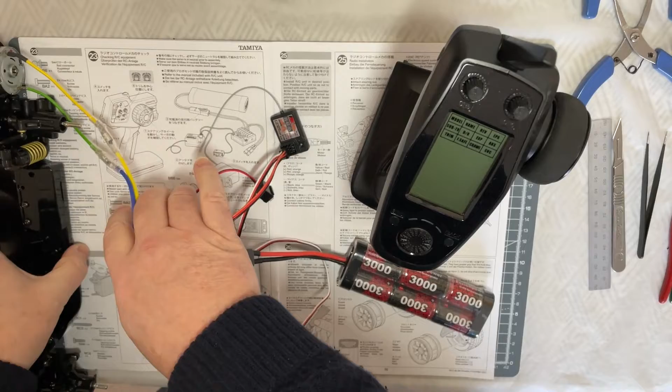Okay, so we are now on step 23, and step 23 is all about your radio gear. With step 23, you connect up your receivers, your servo, and your electronic speed controller.

So as you can see, battery in, motor wires are on, your electronic speed controller on number 2 channel on your receiver, and your servo onto channel 1 onto your receiver.

And here we have my FlySky system. I've selected a spare port on my model port on my actual transmitter, and I've actually already bound my FlySky receiver. So it's a matter of testing and centralizing the servo.

So let's turn her on. There we go, there's that little beep. So servo, as you can hear, as you can see the torque of the servo, nice servo, and we've got forward, brake, and reverse.

Happy with that, they're all working, everything's in place. Servo is now neutralized because I've used that to neutralize it. There we are, we can turn off our systems and start doing the servo.

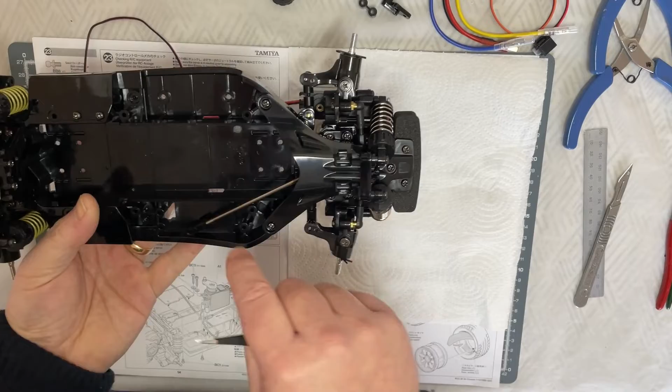Almost like it's slightly off the center. So although you centered your servo, the servo horn is going to be 15 degrees off the center, and I'm assuming that's to make up for the quirkiness of how they've put the steering linkage system in, because it's at a diagonal. All right, so let's put this bit together.

So that's your P5 part. Now your P4 part, you need to put that on top like that. Then we need to do this A3 part, so we'll put the little ball connector on top of that.

So we'll take our driver, that's a bit better, straighter, there we are. Drive that home. Like that. That will go then like that.

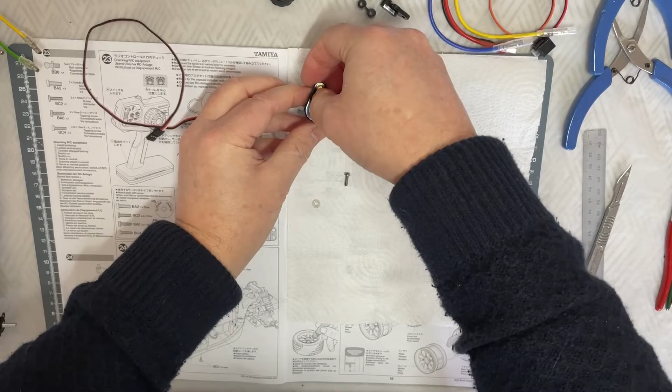So what we need to do is we need to adjust. So this is 15 degrees the other way, like that. Okay, and then pop that on there.

My 3x10. Need to screw that into place onto the servo. There we are. So now we have step 23 completed, and we continue on.

So for step 24, we need some more component parts. So we need the B5, which is this plate. We need the A5, which is this. We also need this part here, which is the A1, which is this guy here.

We need some more parts from C-Bag. So BC1s, we need 2 of those, that's the 3x6mm machine screws. BC3s, 2 of those, which are the self-tapping screws, 3x18mm. BA6s, which are self-tapping screws again, these are the 3x10mm screws, and we need the BC8s, which is the washers. We need 4 of those.

Okay, we need those. We need our servo, which we made up in step 23, and our chassis. We're going to place the servo into the chassis, connect it to the steering linkage system, and put this cover on as well. All right, nice easy step again.

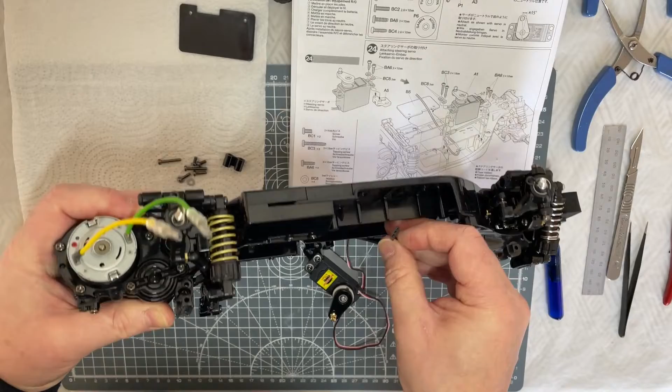Like that. Okay, I anticipate there'll be some form of glass tape or something over here in a moment, later on in the later steps, but we want to make sure this is kind of straight and looks nice. So I'm just going to figure out which way round to put this.

Okay, so I figured out the neatest way I can do this is to little loop here, because there's another little bracket we've got to fit in, which is this A1 part, and then it goes sort of down into the bottom of the chassis and across like that. So there we are, that's kind of where we need to be. So this little part here is going to go in here underneath the servo and connect the servo and the chassis together, and that will keep the cable where I want it to be.

So we're going to do that next. Just line that up, and then take the longer of the self-tapping screws and the washers. So we're going to be using the BC3s and the washers. One on that side, on that one, and one on that one. And then screw these through, and that'll screw the servo all the way down onto the chassis.

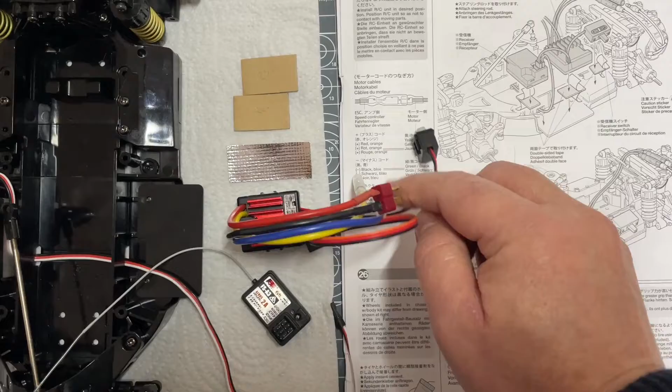Okay, so for step 25, we need to start thinking about putting our receiver and our electronic speed controller, our little switch, and start thinking about putting these into the chassis. So it says to put it here onto this plate here, so you need to pop those there. The switch was going to be double-sided onto there, and the receiver in here as well, whichever way around suits.

So yeah, got some of this glass tape to stick down here so that it just doesn't get rubbed away, and we've got some double-sided tape to stick on the back of your electronic speed controller and your receiver to be able to stick onto this tray.

So I'm just trying to work out where best to put these items, because I know it says put them on this plate, but I'm kind of thinking maybe the receiver can go more inboard, depending on where we want to put the battery, because I've got a bit more flexibility since this is the long chassis, so the battery could go here. I know the manual says put these parts down here so that the battery sits more at this end of the car. So I'm kind of thinking perhaps I don't want the receiver at the front end because it's a bit open.

And don't want it too near here, and I'm wondering if there is a possibility of adjusting this slightly and putting it so that the battery is more forwards, bringing some of the weight to the front of the car, and putting this more at the back here like this, so that stops it from jiggling around, so the battery doesn't jiggle around, and perhaps might even be able to stick this somewhere at the back here instead. So we'll see, won't we?

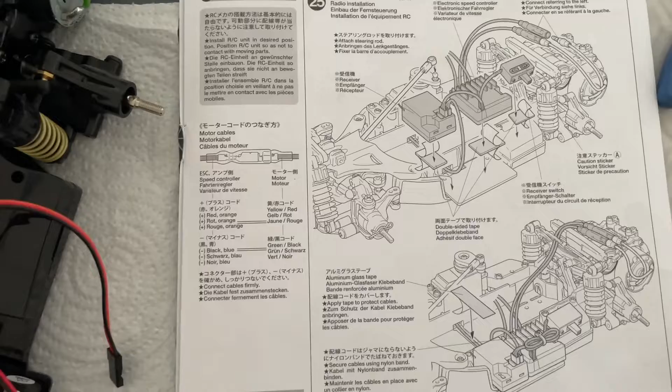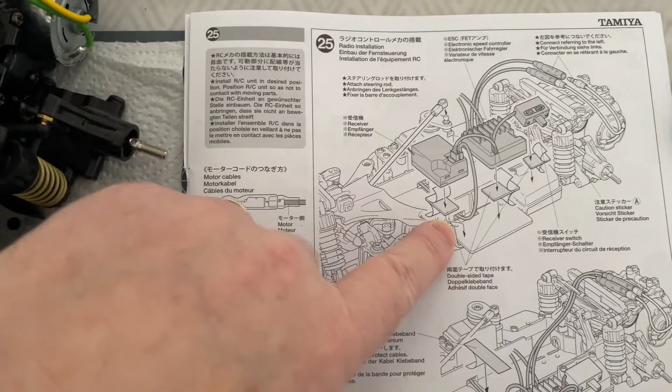See how it goes. We're continuing on with step 25, which is installing the radio gear, ESC, and wiring. I've just got a slightly different route. So on here it says put the receiver and the ESC on the plate.

I've got a bit of wiring to tidy up, but I've decided I'm happy to put the electric speed controller on that plate, no problem, so the switch can stay on the side of the ESC rather than being stuck at a weird angle. They say put the switch on top of this bit here, but no, I've decided to make a little bracket to fit in and put my receiver on there.

The reason being, once you put the battery in, there's a spacer, and I can bring the battery forward. The battery can sit in there, and that little spacer stops it from going in, so that should allow the wiring and such to go into that area. It should be enough room.

So I've got a bit of cable management to sort out now, and then we can get on to step 26, which is the wheels and tires.

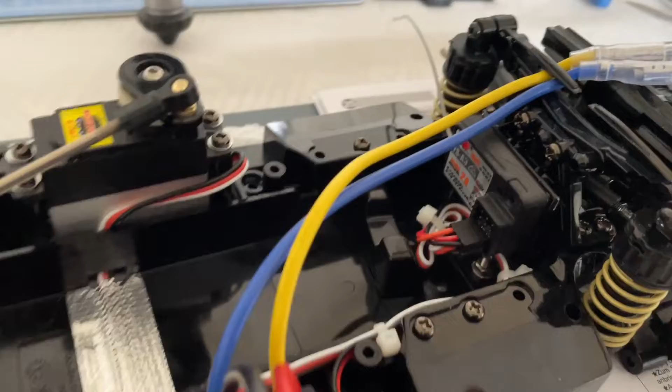Pretty good though, I think that looks a bit better. With a little bit of patience and manipulation, I've kind of got the wiring where I need it to be, underneath the receiver, with the motor wires going out to the back.

Just got to put some more cable ties on to hold it in place, and then we worry about this battery one afterwards. So we can now move on to the wheels and tyres at this stage.

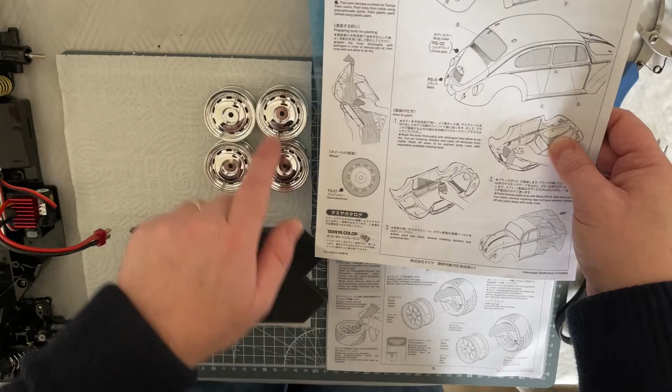Into the next step, we're on step 26, and it's wheels and tyres time. The Tamiya manual, on the bodywork side, talks about spraying the aluminium wheels. They've got this nice chrome finish, and they talk about putting on this gloss aluminium, leaving a chrome finish in the centre.

While that perhaps might look nice and more period, I quite like the wheels as they are. I like this chrome finish, it's nice and bling. So I'm going to leave that, I'm not going to do this colour scheme. Anyway, tyres time.

There's two sets of tyres for this chassis. You've got a front set, which are in this blue bag. Just have a quick sniff... oh yeah. These are the standard road tyres with the grip.

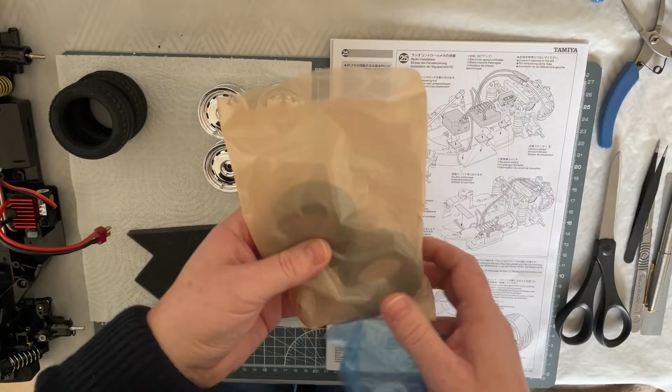Then you've got the rear set of tyres in this orangey sort of bag, and these feel a lot softer than the front ones, so I think these are going to have more grip. Because it's a rear wheel drive chassis, you're going to want a bit more grip on the back. About the same, sorry, have to do the sniff test. Yeah, you can blame Simon Webb for starting that off, pop along and see his channel.

These rear ones have a little '2' symbol on the inner wall here. I don't know if the camera will pick that up, but those are the ones that go on the rear because they're a softer, much softer compound, a bit stickier as well, so I can see why they'll give more grip for the rear. So it's a case of putting the foams inside the tyres and putting the tyres on the wheels, and the wheels we need to super glue just to make sure they don't come off.

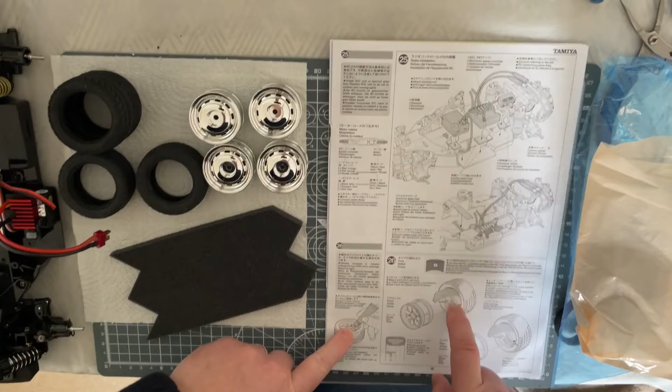That'll be step 26, so I'll get them done and show you the results. For step 26, we're just basically putting the tyres and wheels together, and you'll see the foams go in there.

Look, you can see I've just literally maneuvered that in, you just make it, press it in. There's no real technique to it here. You put it in, you meet up the sponge, and you just push it in. So there we are.

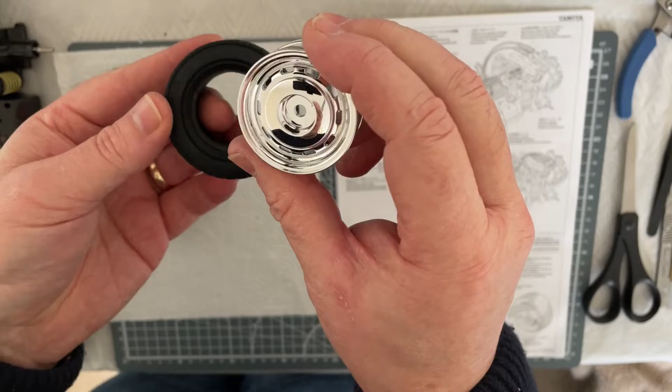So once you've put the sponge inside the tyre, you then take your wheel, and there's no right or wrong way of doing this. You maneuver it, get the thread over it, and stretch it and give it a tug here and there. The idea is you want to make sure you get this fitted correctly.

The drawing says the idea is you need to get the sponge sitting in the middle of the wheel, so that the rim at the edges, the bead, actually sits correctly in the wheel. So you sort of have to manhandle it a bit to get it round, and then push the sponge into the middle so that it seats correctly.

You basically go around feeling for the sponge going into that center rim, and make sure the bead sits nice and straight. If it's sort of sitting up like this, you know it's not sitting correctly, so you've got to manhandle it around a bit and get it to sit right.

That's all we need to do, and once you've got it sitting right, you can start thinking about gluing them. Got to have a little look at how they look on the car first before I glue them. I don't know whether I need to do this extra bit of painting or not, but we'll see. That's kind of how you put that on. Needs a little bit of manipulation.

Let's put that sponge in. Yeah, there we go. So that's the wheel and tyre, and you can see I've done the fronts and the backs.

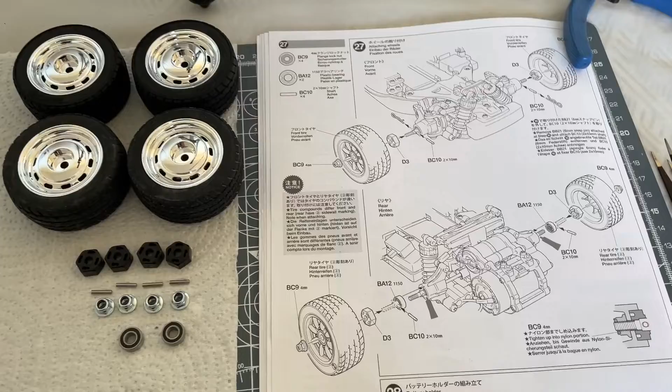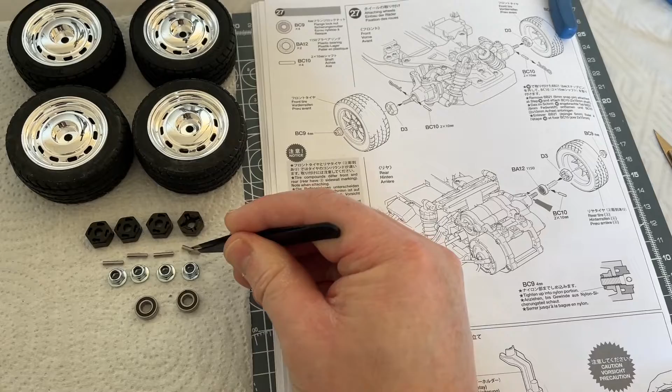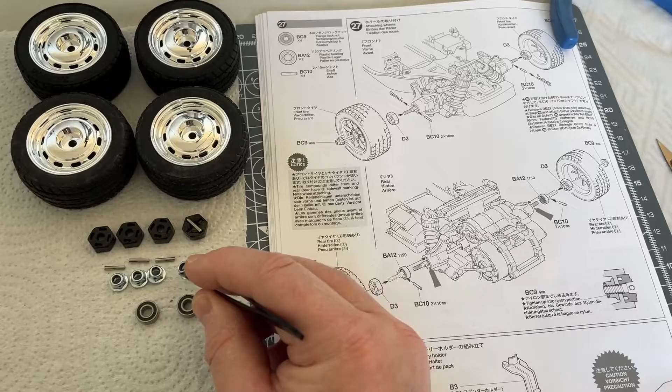Here we are, we're now on step 27, and step 27 needs some more parts: 12mm hexes that go with our wheels, our axles, our little shafts here. These are the little 2x10mm shafts that go across the axles and locate in the hexes. We also need our wheels and tyres, our wheel nuts which are 4mm flanged with a locking nut system, and a couple of our 1150 bearings.

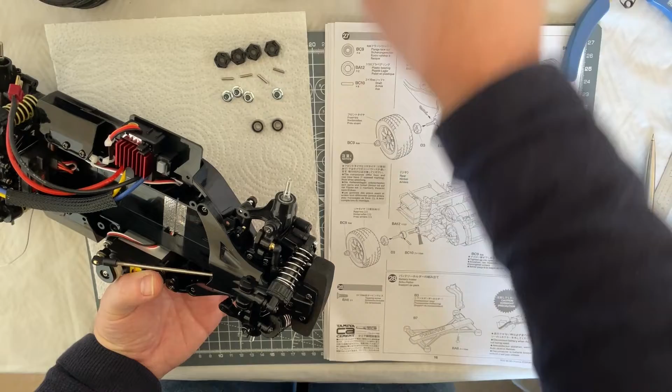Let me show you how to put the front section on. So we're going to move out the pin like that, keep hold of that for another day, and replace that pin with one of our 2x10mm shafts. Pop that through the same hole the pin went through. Take one of your hexes and push that on like that.

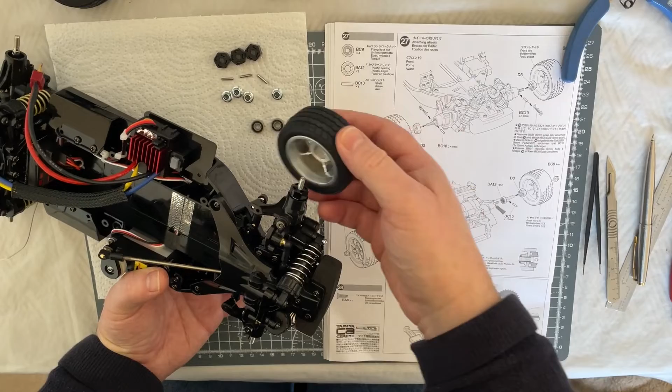Take one of your front wheels, there we are. Then take one of your 4mm flanged locking nuts and tighten that up onto the wheel. It's as easy as that. That's the fronts, so I'll do the other front and show you in a moment.

And there we go, that's your front wheels on with the bearings. Right, now we're going to do the rear of the car. Very similar to the front, except we've got to get one of our 1150 bearings on. So take your bearing, pop that over the axle, and make sure that goes in all the way home. There we are.

Then we need to make sure the 2x10mm shaft goes in, like that, there we are. Our hex goes again over the shaft, and then we take one of our rear wheels. Remember, our rear wheels were the ones with a little 2 on them. Take that on.

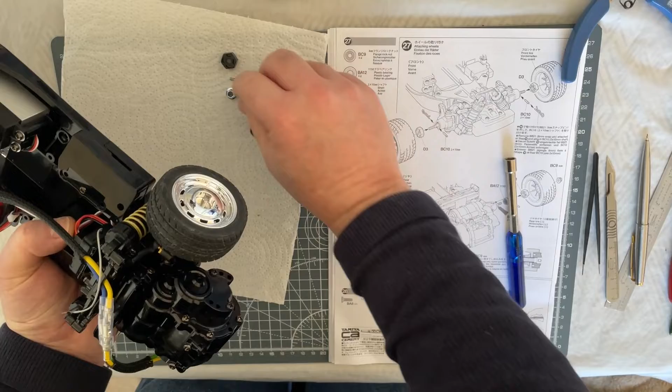And again, our 4mm flanged locking nut to lock it into place, like that, there we are. I'll do the other one and come back to show you how it looks. And there we go, step 27 is now completed.

We have our rear wheels on now. Remember, these are the ones with the number 2 stamped on the inside of the tyre, so make sure you get them in the right order. We've now got the car actually on its wheels. There we go. Just that very springy suspension to think about.

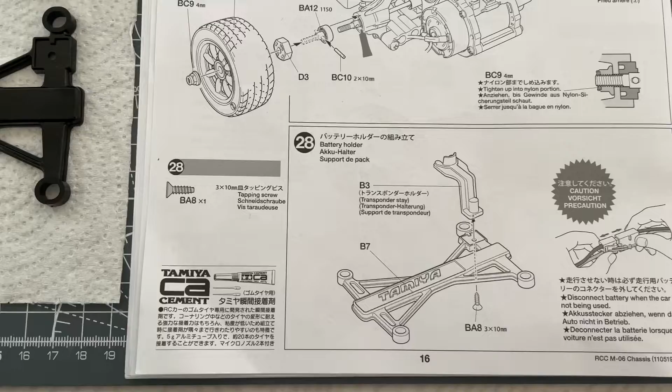Anyway, there we are, we shall move on to step 28, which is the battery holder that goes in here. We've got some other little fine tuning to do, and step 28 is all about the battery stay and transponder.

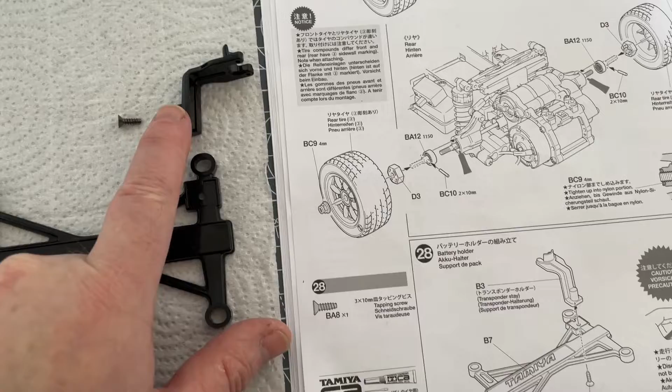So we're going to take our B7 part, which is this over here, and take our B3 part, which is this over here, and screw it together using a 3x10mm self-tapping countersunk screw - countersunk, as you can see. There you go, easy enough step. Just going to show you what it looks like.

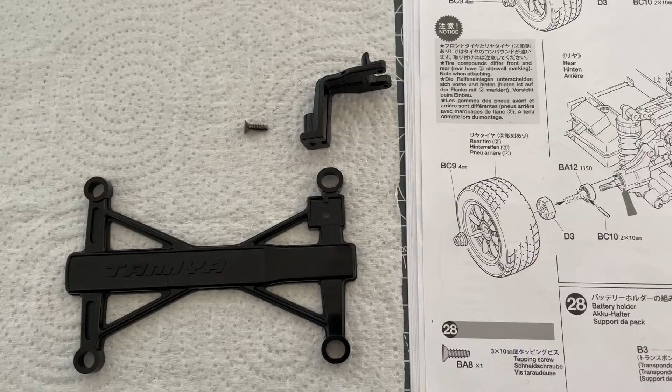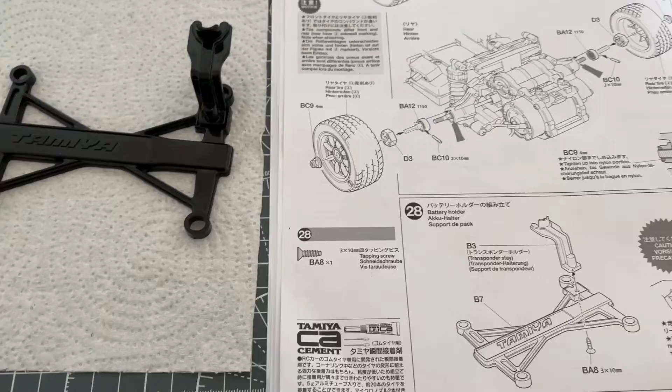And there you go, that's screwed into place with one of the countersunk screws. All right, easy enough done. That's step 28 completed, and we're now on step 29.

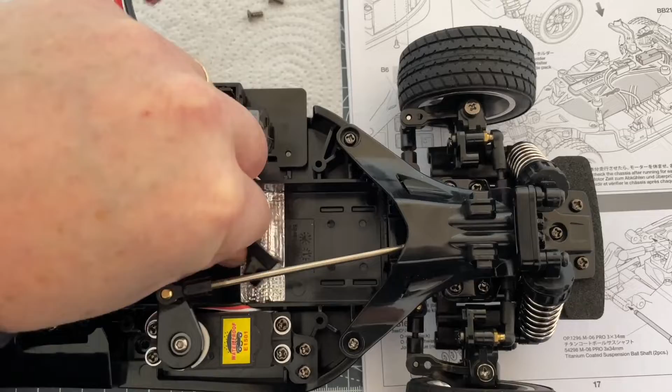Step 29, we're going to do this section here, which is our B11 and B12 parts, which are these two parts here. We've got our R-clips, which are there. We've also got our B6 part here, which we're going to position into the chassis, depending on which model you have. On my chassis, I'm moving my battery a little bit more forward, so I'm going to place my B part in the chassis a little bit more here, in these areas here, which will bring my battery more forward. And put the transponder battery stay across the top. So I'll show you how it's done.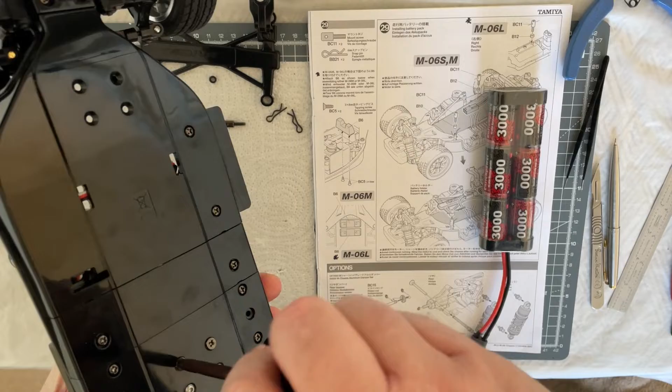So let's do the little B6 part first, which goes in the chassis where the receiver is. Turn the chassis upside down, and we're going to use those little countersunk 3x8mm screws. Countersunk those, one there, and let's grab this other little one. Yeah, there we go. And we just tighten those down. Easy enough step. So they're now tightened up, done and done.

So now you will see the method in my madness - my battery is going to sit like that. My receiver, as you can see, is back there. It sits nicely. I might put a little bit of packing just to stop this from jiggling around a little bit, but that's that bit done.

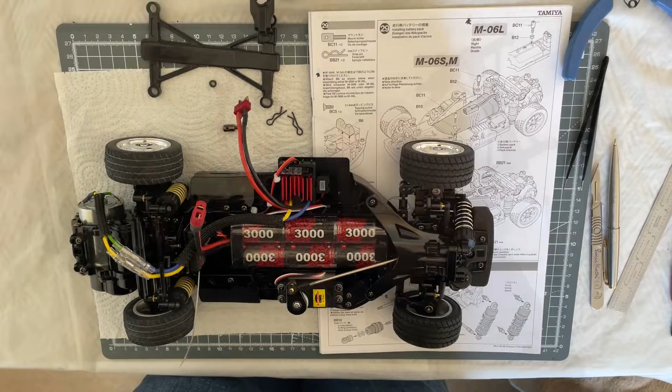So now we can do this top stay. We take our BC11s, one of our BC11s and our little B10 part, pop that in there and screw that into that place there, like so. So we've got one at the front, easy enough to do.

And the other one is going to go back here. Like I say, slight deviation from the plan of the long wheelbase, because I want this to catch across there and across there like that. That's what I want.

All right, easy enough to show you. Just screw those in until they're all nice and home. And just screwing the last of this in. There we go. And then you line up the holes so that they run this way.

Okay, and then you're going to take your two R-clips, and you're going to pop the brace across there and across there, and then what you're going to do is pop your R-clip in there, and that holds your battery in. It's easy enough to do.

Okay, and you're going to connect your battery up like so. Well, a bit more cable management to do, I think - I don't like these flopping around. Anyway, there we go. So that is technically step 29 now completed.

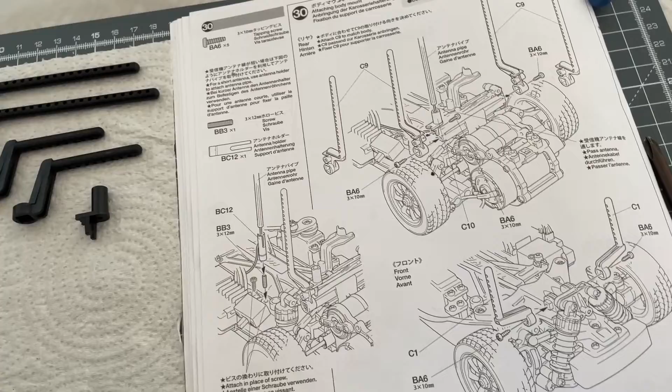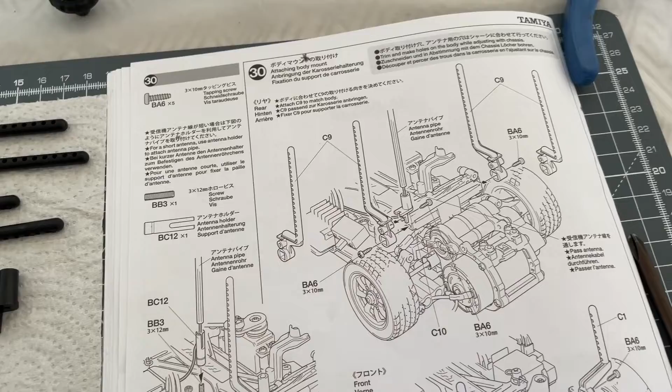And here we are on the last step. For the rear of the car, we need the C9s, which are the longer of the body mounts, and for the front of the car, we need the C1s, which are the shorter of the body mounts. You've got a choice of using the antenna system - either this system here, where you put it on the slopey section of your car, but I'm not doing that. Mine's going to be more at the back here, so I'm opting to go for this part here, our C10 part, and screw that into the section of the rear body mounts.

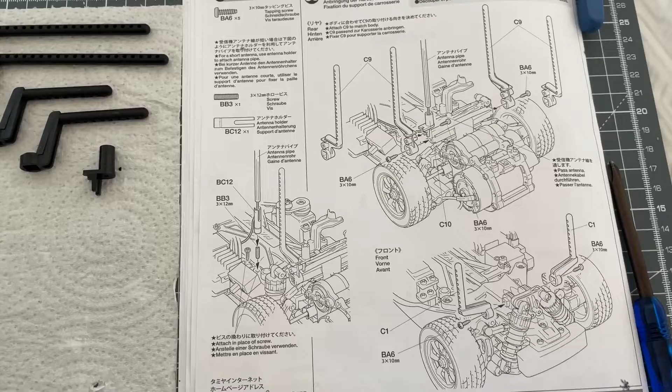Okay, so these are easy, I'm just going to show you once they're done. And there we go, step 30 is now complete. We've got the front ones on, and the posts for the rear as well. And there's the post connection for the aerial.

I kind of used a hole that wasn't being used by the suspension to pass my aerial through up the tube. There we go. So there we are, that is it.

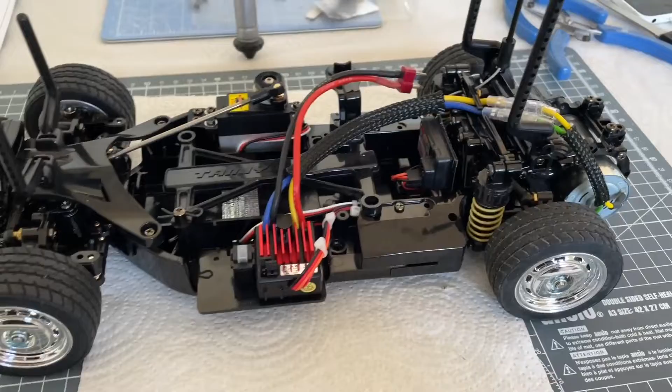We now got to sort out these horrible pogo sticks, and then put the body on. So yeah, might just put the body on, see how it looks like with the pogo sticks for now, and then do a pogo sticks conversion to oil shocks. Right, let's see what it looks like with the body on.